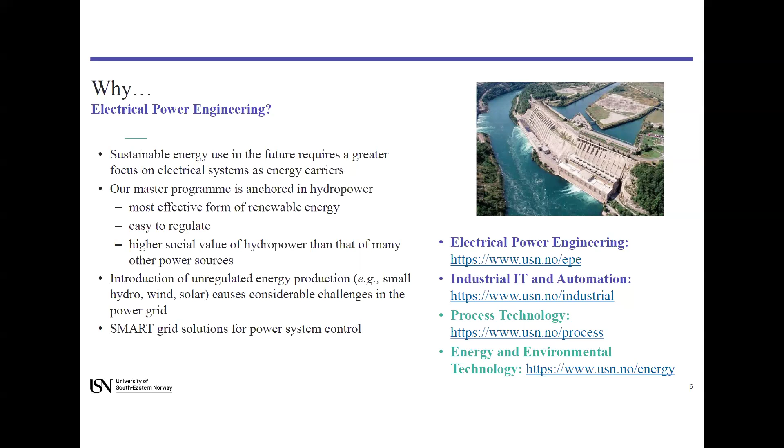We have different research groups focused on power, energy, smart entrepreneurship, modeling, control, etc., which are our specializations in the department. Most of our research activities are funded by the Government of Norway through the Norwegian Research Council, or from private industries or regional authorities. Our close collaborators include SINTEF, the largest research center in Norway and across Europe, as well as Equinor, the largest offshore wind technology developer, and local municipalities including Porsgrunn and Skien municipalities, and ABB.

As I said, we are running many projects in close collaboration with industries, which includes hydrogen as a powertrain for ships and ferries, in close collaboration with Statnett, the largest transmission and distribution operator. We are also working in India on many developments in transmission and distribution in collaboration with the Government of India, and we have a close collaboration with the National Renewable Energy Labs from the United States.

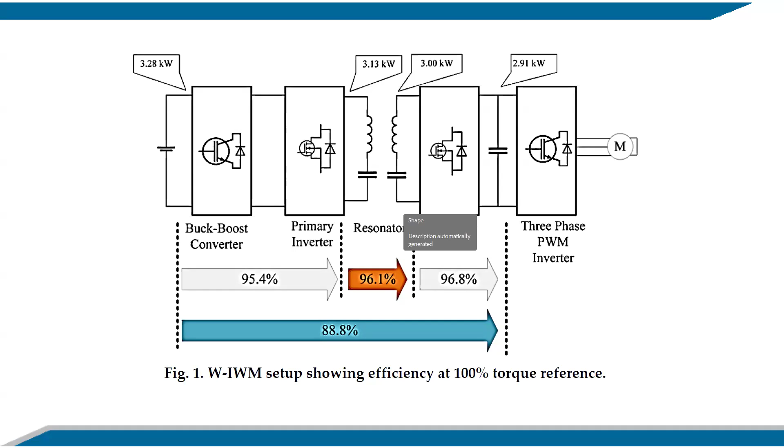Moreover, the design of high frequency coils also has magnetic losses. These losses need to be compensated, so wireless charging is still not very attractive for these reasons. Regarding batteries, currently all electric vehicles are focused on batteries, but many batteries are prone to runaway or fire incidents, because some guidelines are not being followed by manufacturers.

Where do these guidelines come from? They come from the Advanced Battery Consortium, which is called USABC, from the United States. There are some guidelines, a primary goal and a secondary goal, to design the batteries. So in case of energy density, it is around 135 for the midterm, and for long term it is 300.

Life cycle for charging and discharging will be around 600, now extending near to 1000 is possible with the EVs currently available in the market. And the price of the batteries per kilowatt hour is less than $150 for midterm, and long term is around $100. The operating temperature is around minus 30 degrees to 84 degrees centigrade in consolidated operation between midterm

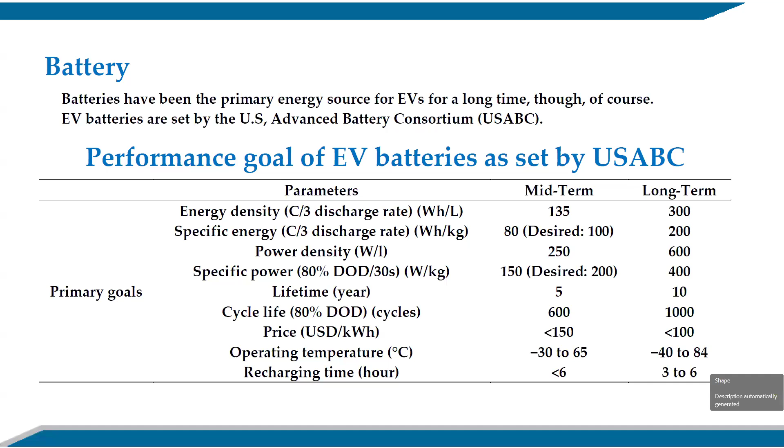to long term. And charging is always less than 6 hours for small vehicles, and for long term goal is around 6 hours, which is pretty high. And about fast charging, which is a recent attraction in electric vehicles with the batteries, with respect to the state of charge, it is less than 30 minutes. Still, we are not having such facilities.

And about the future, as I said, we are moving from fuel cells and fossil storage tanks into DC grids, because charging all these batteries in the future is required. We have different levels of batteries. Here I have shown until 600. Now the scales rise up to 1200 to 1800.

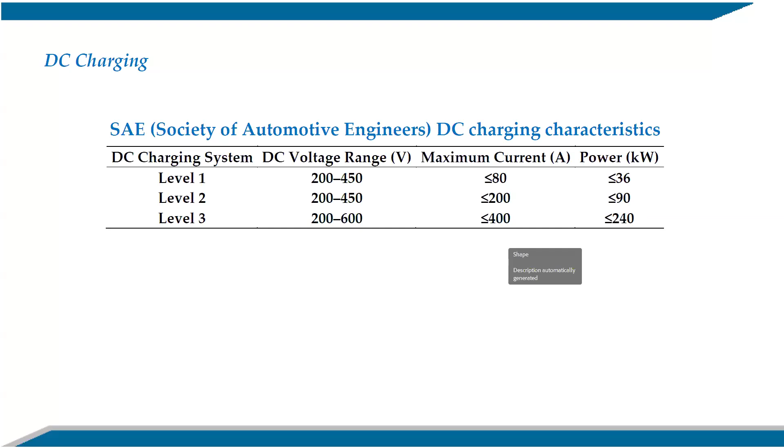And in these three level scales, the power can vary from 36 kilowatt to 240 kilowatt capacities, and the current can vary from 80 to 400 ampere capacities. But the scale, as I said, has been increased now to 1200, next 1400. In the scales of 400, DC microgrids are required.

About power electronics converters, many configurations that I have shown here are already available in the literature, and are widely used in practice. So if you look at this converter, which is called a universal DC to DC converter, it's a parallel combination of two buck converters connected with one boost converter. So increasing the current can be done here, and whatever voltage is available at this device will be increased to a higher level.

Again, it has been stepped down by using a buck converter. So a buck converter is a voltage to current converter. On the input side, you'll have a higher voltage. On the output side, the current will be higher. So for the charging applications, we use this combination to enhance the capacity. What is the drawback? Limited duty cycle combinations.

Even though we are increasing the current to higher limits, the devices have a long conduction angle, which increases the conduction losses, and the overall efficiency of the system, even if you increase the current, will be limited by conduction periods.

And in other aspects, novel configurations are available in real time, even for fuel cell tank power applications, where we can replace these batteries by fuel cells on either side, or one side with the fuel cells and one side with the batteries, keeping the propulsion system, which is a three-phase open winding induction drive. So you have been seeing the configuration, which has a power supply on one side, and the other side will have a star point.

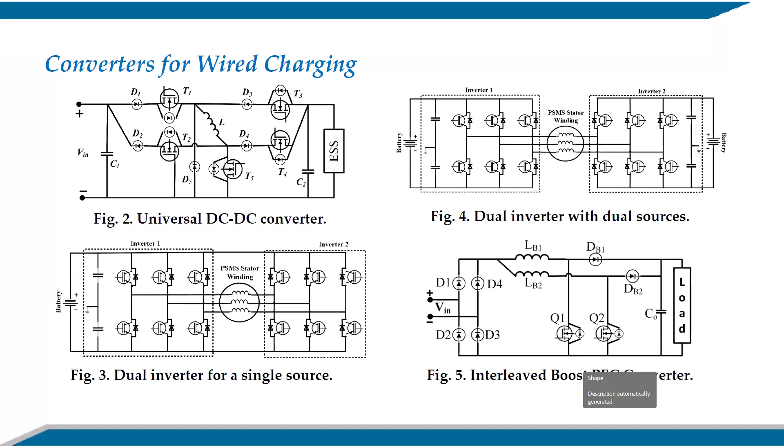And we are using classical boost converters. Again, it is limited by duty cycle, even though we increase the current. So there are some disadvantages in controlling the conduction angles and the duty cycle for maximum utilization. And these all cause more losses and reduced efficiency. Apart from that, we also have other four diode controlled rectifiers on the input side. You can have a look.

And in the full bridge converter here, we are using only two devices which are controlled, whereas the upper devices are only diodes, which is called a semi-controlled H bridge converter, which can control the DC power effectively from the AC. But as we know, we are using half cycle control with two MOSFETs or IGBTs. The efficacy reduces and of course there are more losses in the charging units.

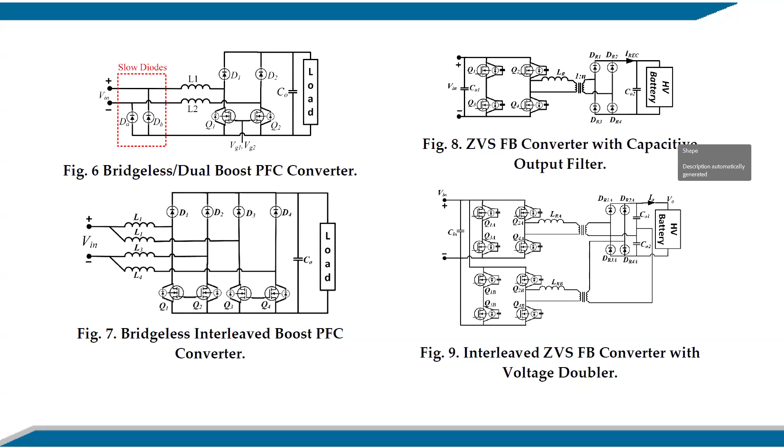The most effective is the LLC resonant converters, where we use a fully controlled bridge rectifier. On the transmitting side, we are including a magnetizing inductor and a capacitor additionally, so that we can improve the turns ratio. In the previous case I showed you, it's a fixed ratio 1:n, but here we can have a variable ratio n1:n2, so we can have variable taps on the transmitting and receiving coil, so that we can have a different power scale of power transfer from the DC side towards the battery or electrolyzer.

And currently we use the modules which are uncontrolled bridge rectifiers. This is a big problem. They are slow transient diodes and are not fully controlled. So we get reduced voltages with much more losses because diodes are slow transient, and the capacitor size needs to be compromised and produces more heat for the batteries.

Finally, I'd like to say either it's for electrolyzers or for hydrogen production interconnected systems, or for batteries, we have options like buck converters, which can be used to send the power from the motor or to charge the batteries. Other options, we have the buck boost converter, which has two modes of operation. We can deliver the power to the batteries or take the power from the batteries towards the propulsion units. The propulsion unit powertrain can be batteries or can be electrolyzers.

So for example, when you apply the brakes in electric vehicles, you generate a lot of reactive energy or regenerative energy from your motor, and it will be fed back to the batteries. It's very dangerous. That's why these power electronics converters play a critical role in both directions, for driving as well as for regenerative energy generated from the motor. It can be stored in the batteries.

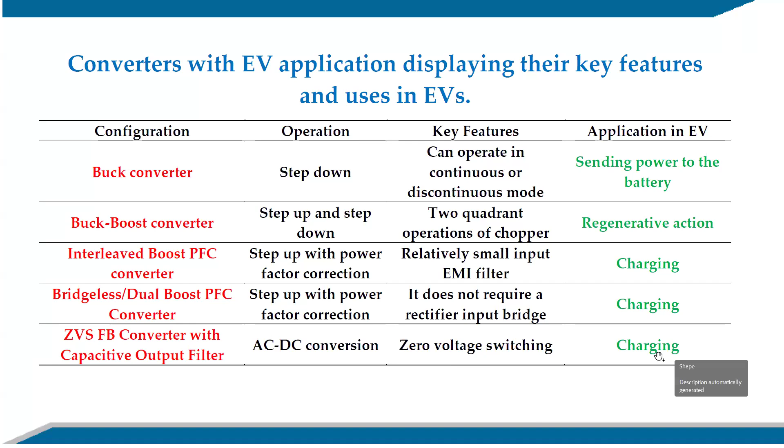And of course, I discussed full bridge converters with the capacitor filters on the transmitter side with zero volt switching, where we can go for variable taps. By using zero volt switching, we can reduce the noise and of course, the losses. Of course, we can use this only for charging.

The fuel cell train is going to be a big market across the globe, and the government of India already declared by 2030 to 2035 to be the largest hub for hydrogen production across the world. And in the context of the European Union, already many electric vehicles are deployed as a hybrid model. We use electric batteries along with the fuel cell as a powertrain, and the fuel cell is the main powertrain, and batteries are like substitute modules during the requirements. And the shift between the fuel cell and batteries is automated by using power electronics converters for power conversion.

Why does the fuel cell have a big market? Because it can be adapted for a 50-watt power supply or even for a small 1-watt power supply towards a maximum 100 megawatt capacity. The most important is the resistance to temperature, which can vary between -20 to greater than 800 degrees centigrade. And the power scale application can be for small power or large power. It can be a vehicle or grid connected systems.

For example, a zinc air battery, which is a typical module of fuel cell, is not widely used. Currently, we use the proton exchange membrane, widely used in practice. So, for example, if you are going to use a zinc air battery, it can be adapted for small power applications, for example, transportation, small vehicles. And regarding the temperature, it can be adapted between 0 to 80 degrees centigrade, and it can be used for applications of less than 50-watt capacity.

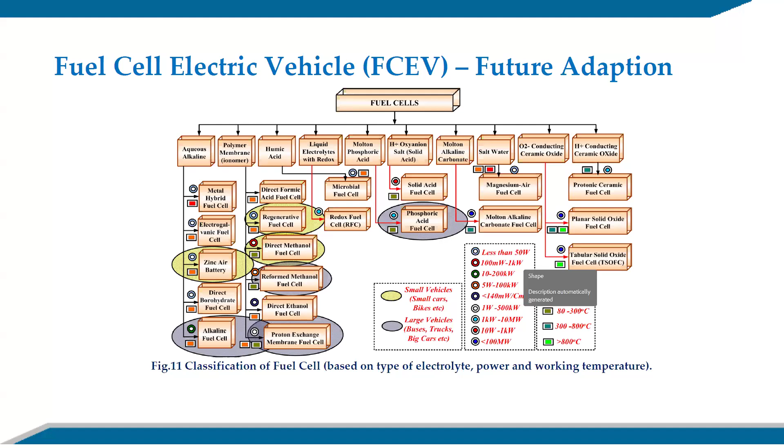For example, for a small domestic car, it's okay with a battery, but think about ships, ferries, or very large transportation systems. So in 2026, one of my collaborating companies from Norway, Brunwell, we are doing a project on offshore hydrogen production in coordination with other partners from Europe, where the Brunwell company is going to release its first 100% power-driven fuel cell ferry in the Nordic Sea.

How it looks, powertrains. For example, in case of a fuel cell based powertrain, we'll have a fuel storage for hydrogen. It will be given to a fuel reformer with an efficiency of 80%. And the fuel reformer is connected to the fuel cells, and the fuel cells' efficiency is only 60%. So efficacy of the fuel cells' power generation is limited by 60%. Here come the power electronics converters to utilize this 60% efficiency very effectively for the powertrain.

So we have two-stage power conversion. The first stage, we use DC to high power DC for the powertrain requirement within the electric vehicle power supplies. Then it is given to an inverter which converts to AC power to drive the induction drives or synchronous drives of the electric vehicle. So efficacy minimum level starts with 80%, which is very effective. By using modern GaN devices or silicon carbide devices, the efficacy can go near to 99%.

Apart from the powertrain, we also have luxurious needs within the electric vehicle. All these can be powered from a small power electronic actuator, which is called a DC to DC converter, with a minimum efficiency of 80%. As I said, for many applications, hydrogen is more expensive. So we look for a combination module. In a combination module, we can bring batteries and ultra capacitors.

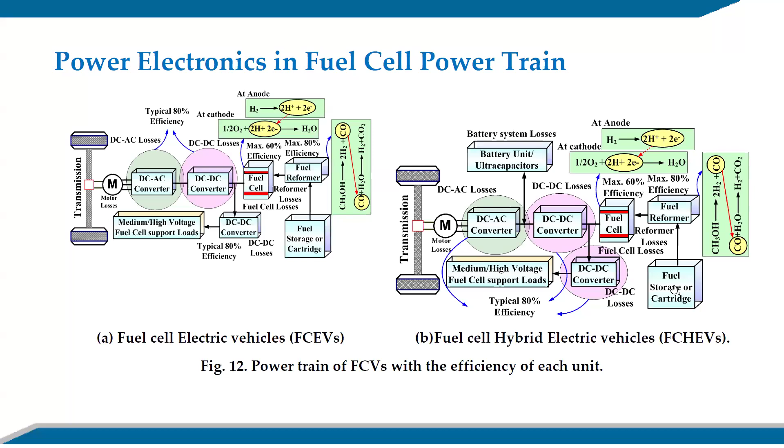So in the future, the vehicles will be propagated along with hydrogen and supercapacitors as definite modules. If you look at a large powertrain application like ferries and trucks, we need to depend more on fuel cells. So the fuel cell is the main powertrain, which is connected to a small actuator for electronics converters to maintain a DC grid of around 1200 volt to 1600 volt as a requirement. On the propulsion side, we will have large synchronous machines which are connected using inverters to convert all this DC power to AC.

And we can't avoid the AC load, which is going to be, for example, around 20 kilowatt capacity, again driven from the inverters. And we have sophistication requirements like lighting, etc., which can be around 25 kilowatt, again driven from a small actuator DC to DC converter. So you can have a look at how a complete powertrain module looks with fuel cells, batteries, and supercapacitor integrations.

So in these aspects, we have developed many of our own power electronics converters in the laboratories where we integrated different renewable energy systems. If you look at conventional modules, we have photovoltaics, wind turbine, and battery, which require four different converters. Because the wind turbine has AC power, it has to be converted into DC and pumped up to a higher level to integrate for different applications.

So with our multi-port converters we developed in our labs, it has multiple combinations of our ideas based on circuit theories. We can connect one converter with multiple inputs, but for the wind turbine, the power has to be converted from AC to DC, so we need additional converters. But the application aspect is the same.

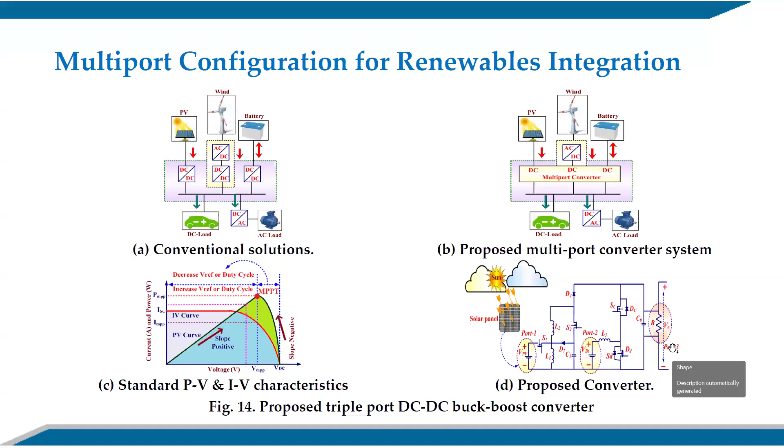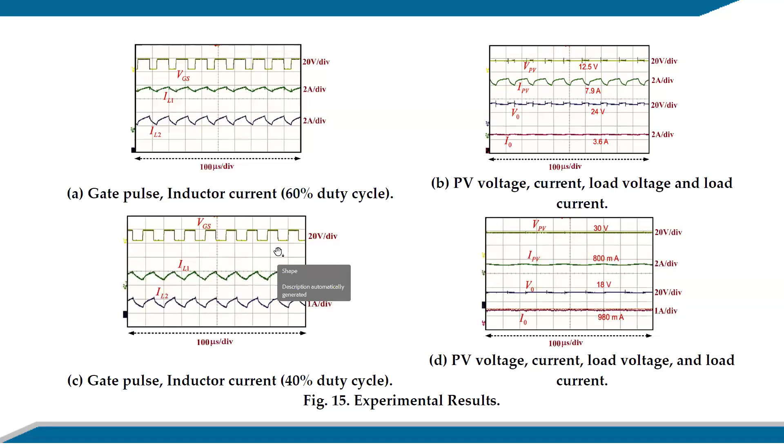And these are modules, you can have a look in simulation modules. Obviously, the efficiency will be very high, near to 97 to 98%, but not in real time. The efficiency is limited to 93% because of various switching losses, conduction losses, and EMIs.

On these aspects, particularly for fuel cell aspects, we develop new power electronics converters from our own ideas to integrate for higher voltage levels between 400 to 800. For laboratory testing, we withstand around 400. So the interconnected system has large scale fuel stacks, photovoltaics, and batteries. Why we use batteries? Because if there is excessive power generated from the fuel stack and photovoltaics, it will be stored in the batteries, and during the peak demand for electrification of electric vehicles or DC micro homes or DC homes or existing AC grids, we pump the power from the battery.

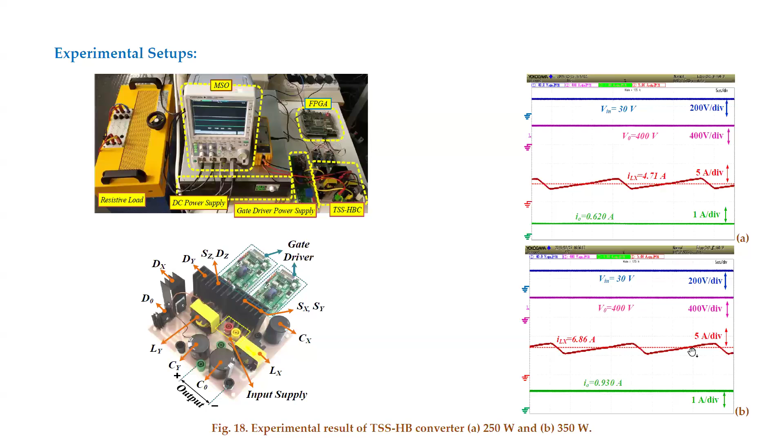For more visualized results, you can have a look—why we are zooming into these results is to show you how the modulation of the converters is carried out for smooth regulation of all these currents, which are very vital. Apart from that, we also worked on industrial solutions.

Quasi-Z source inverters are highly used in forklift applications where high power trains use small electrolyzers or battery banks. In this case, we try to figure out a new configuration, a modified solution.

We introduce a switching inductor. We call it a switching inductor because it stores and delivers energy to the capacitor based on switchings. Here we introduce a new configuration along with capacitor C2. It becomes a novel configuration of the quasi-Z-source inverter.

The idea is: when the switch is closed, we energize the inductors LX, LY1 and LY2. When the device is open, this energy is delivered to C1, and the LY1 and LY2 energy is delivered to capacitor CY. All these capacitors operate in parallel, adding up the voltage and delivering it to the load side standard boost converter.

If you look at a quasi-Z-source converter, the lower side is a very standard boost converter. All configurations available in industries or research are based on a standard buck or boost converter. For example, if you remove all these blocks and put a MOSFET, it becomes a standard boost converter. So we are adjusting based on circuit theory, and combinations of passive components create new configurations.

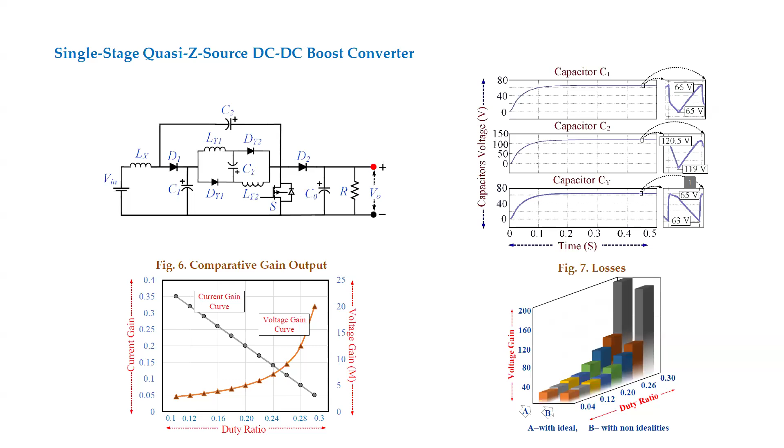If you look at the ripple content or AC component available in the DC, it is limited to not more than 1 or 2 volts, which is pretty good for regulating IEEE standards and ensuring the reliability of electrolyzers connected on the input side.

Of course we also worked on SEPIC converters, because SEPIC converters are highly used in forklifts to integrate electrolyzers and battery banks, but their efficiency is limited, power density is limited, and overall power transfer is limited.

So in this case we made a new modification by introducing the inductor Ly and capacitor C2, a new combination. We brought a new modified SEPIC converter which is able to enhance high power density.

For example, when the device is closed, we energize Ly and Lx. When the device is open, these energies are delivered to C1 and C2, and they become a parallel combination to increase the load side boost converter voltage. This is a load side boost converter, but with an inductor grounded between the positive and negative, so we get a very high power voltage on the load side compared to the existing SEPIC converter.

If you look at the losses: the device provides 47% losses, the diode between 12 to 13%, inductors 10%, capacitors 5%, and the combination of other passive components around 0.4%.

Typically we tested all these high power converters at a low power scale, like 100 watts, for safety reasons. We got efficiency around 91.4%. If the power scale is increased, we will obviously get around 98% efficiency.

Most importantly, power electronics converters do not operate linearly when integrated with electrolyzers or batteries, because they are highly non-linear. We try to figure out these non-linear operations. We call it continuous conduction mode, which is a linear operation, and discontinuous mode of operation, which is highly non-linear because the frequency goes much higher than the switching frequency.

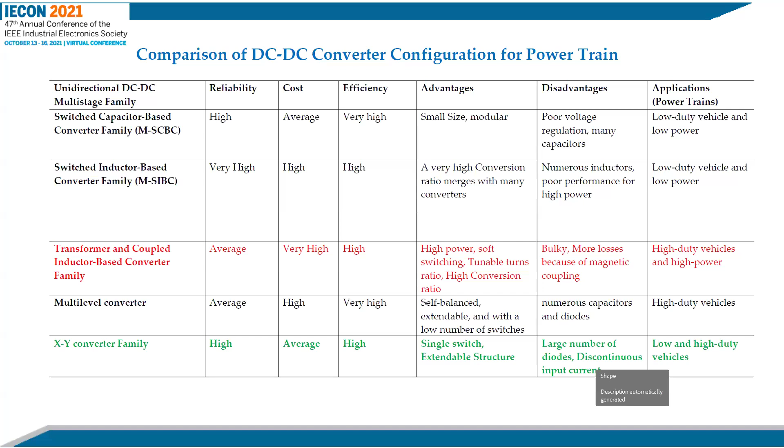Apart from DC converters, we also work on AC converters having six-phase systems where we are able to use electrolyzer as one source, along with batteries, supercapacitors, and photovoltaic modules. So we can have four different power supplies integrated into the same system for high propulsion devices like multi-level converters. The advantage of these converters: if one fails, we can still run with three.

At the worst case, if three inverters fail, we can try with one inverter, but the power is reduced to 1/4. If all four are available, we can run at 100%, but with only one, it goes down to 1/4.

What is the advantage? The phase voltage is like a multi-level inverter, which goes to 9 levels. The fundamental voltage has a pure sinusoidal structure, and the line voltage can pump up like a 5-level inverter with more sinusoidal characteristics.

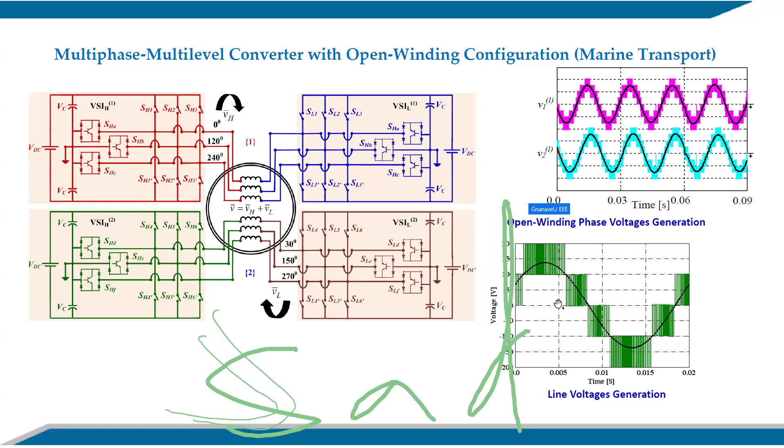In conclusion, I want to emphasize how fuel cells will have a futuristic goal. It will be the main powertrain for low-cost vehicles, becoming a prerequisite because with batteries alone we can't run for long. Currently, lead acid batteries are not available for this purpose. Lithium ion batteries are currently used but have a limited lifespan, and there are efforts needed to find new technologies for recycling, with still no reliable solution available.

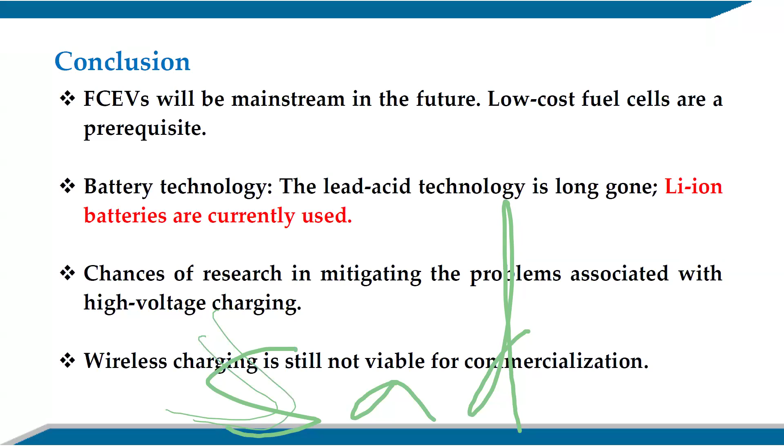Voltage instability may arise, and harmonics and voltage sags will occur by integrating all these renewables, particularly with high electrolyzers. Then smart grid technology needs to be employed. In the future, all these vehicles, particularly from the battery concepts, will connect with the grid-to-vehicle system by adapting smart metering technologies.

We'll be discussing this in my second lecture in a few days, where I will show how we are integrating IoT sensors and smart meters on these topics, which also creates system stability and penetration issues. So for future research, there is a big goal for energy management algorithms using AI solutions, artificial intelligence solutions, and of course there is a demand to increase energy management algorithms.

Thank you very much for your attention. If you have questions, I'm happy to respond.

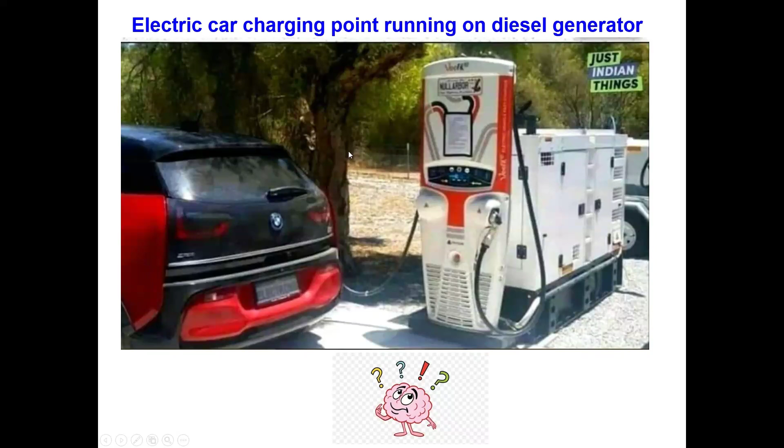So alternatively, we have to use renewable energy sources. Wind energy has the capability to fulfill the current energy demand, but it is seasonal as well as regional. You won't get wind throughout the year, so you are unable to produce electricity throughout the year. But alternatively, consider solar. India is a sunlight-abundant country. So we have to consider solar for making the perfect green vehicle. This is the first option.

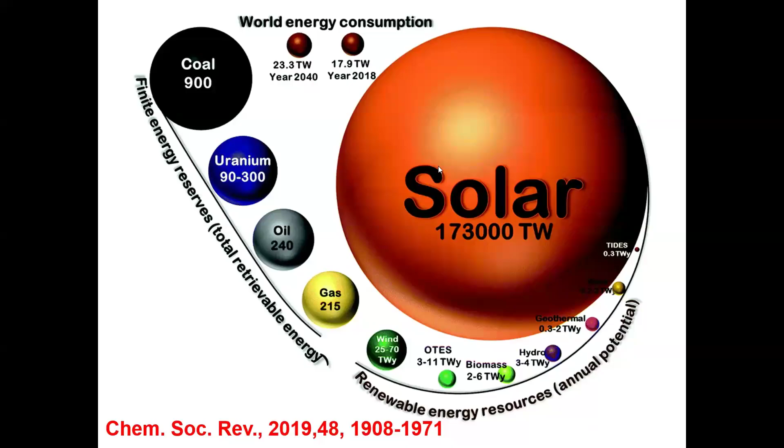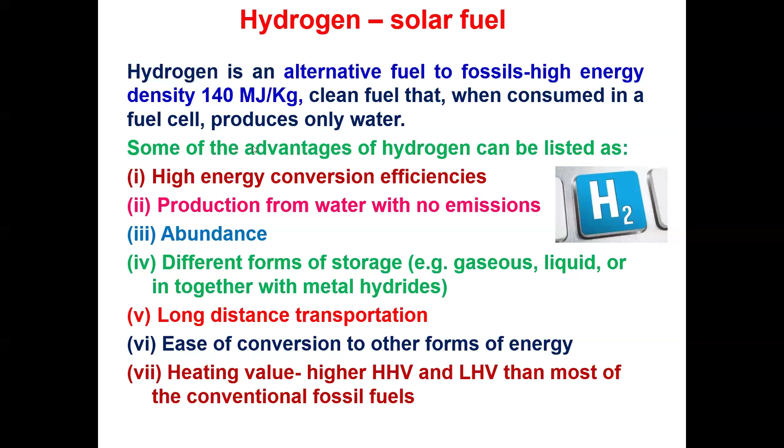The second option is hydrogen. Hydrogen is an alternative to fossil fuel. It has a high energy density of 140 megajoules per kilogram. It is a clean fuel, and it can easily be produced from water. Hydrogen is earth-abundant, and while producing hydrogen from water, no hazardous substance is produced. You can easily store it in different formats, like gaseous, liquid, or solid state. So it can be used for long distance transportation. These are all merits of hydrogen.

Hydrogen has different color codes based on the origin of the starting material and the method of production. There are three methods used to produce hydrogen: electrolysis, steam methane reforming, and coal gasification. In coal gasification, we use coal as the starting material. While producing hydrogen, it emits carbon dioxide into the environment. If you leave that emitted carbon dioxide as such, it is called black hydrogen or brown hydrogen. If the emitted carbon dioxide is captured and stored, this kind of hydrogen production is called blue hydrogen.

When you use natural gas as a starting material, it is subjected to steam methane reforming. It produces hydrogen and releases carbon dioxide to the environment. This kind of hydrogen we call gray hydrogen. When we use the electrolysis method and the electricity used for splitting water is generated from nuclear energy, it creates nuclear waste, so we call it pink hydrogen. If we use renewable energy like solar or wind for the water electrolysis process, it is called green hydrogen. So these are the color codes for hydrogen.

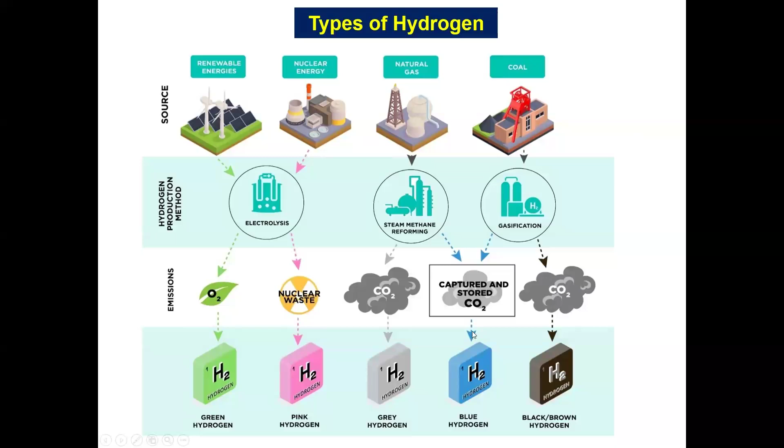Now look at this. These are fuel cell vehicles. This is a fuel cell train running in Germany. A fuel cell truck. This is Toyota Mirai running in Japan. This is a zero emission bus running in the United States of America. This is a Hyundai truck. These are all e-vehicles, but they use hydrogen as the starting material for producing electricity.

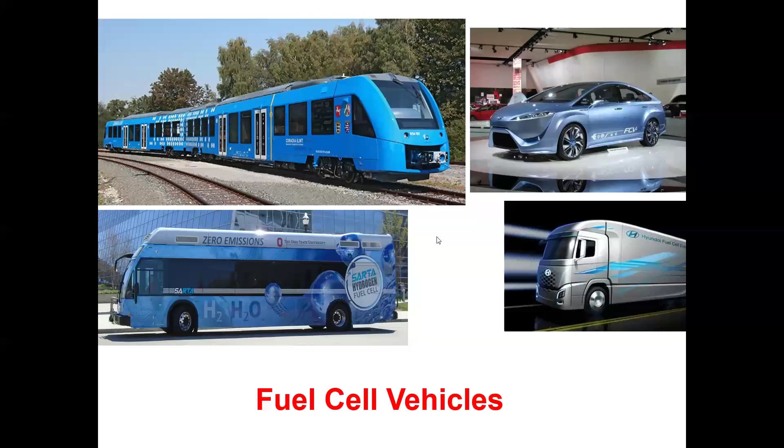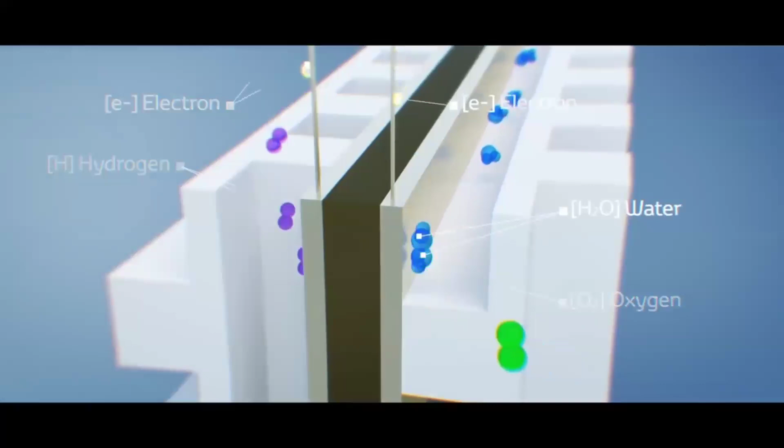Sir, yes, ma'am. Sir, you have muted your mic. Please unmute it, sir. What is that, ma'am? Your video volume we couldn't hear, sir. There is no volume, madam. Okay, sir. Okay. Thank you.

So if we have hydrogen, we can run a 100% green vehicle for mobility. This is the advantage of the fuel cell vehicle. If we compare with a plug-in type EV, you have to wait 2 to 3 hours for a complete charge to drive 400 kilometers. But here, in 3 to 5 minutes, you can fill 5 kg of hydrogen and drive up to 500 kilometers. That is another merit of this.

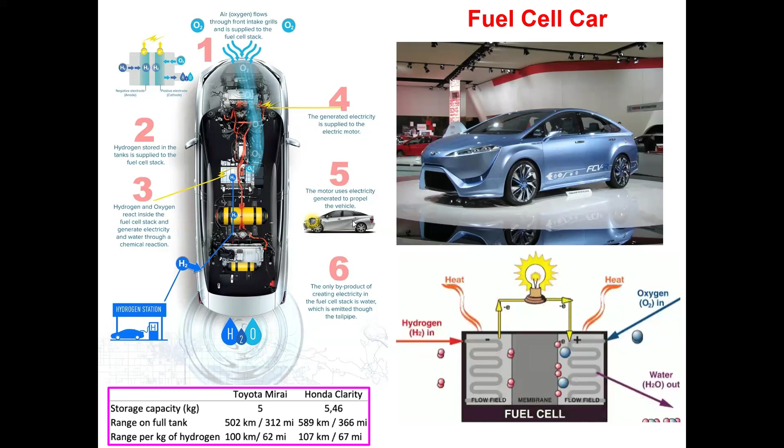Whenever we talk about the advantages of a system, we have to see the limitations or drawbacks. Hydrogen is highly flammable. One time a Toyota Mirai car had an accident, the hydrogen storage tank exploded, and it immediately caught fire. There was another incident in Norway where, due to improper handling and storage, a hydrogen filling station exploded.

Excuse me, sir. Sorry to interrupt. It requires high pressure, no, sir? So storing hydrogen and the safety-related issues, how could we handle them? That's what I am going to explain. Okay, sir. Sorry.

Later, all the vehicle companies did R&D. Because it is stored at high pressure, you need an excellent storage tank. It is developed with a layer-by-layer structure: high density plastic as the inner layer, then carbon fiber composite to prevent catching fire, then glass fiber composite, then polymer foam, and finally fire resistant composite material at the top to protect it.

For mechanical strength, they use the polymer foam and this layer-by-layer structure to avoid explosion as well as catching fire, and they use flame resistant composite material. Finally they ended up with this. Later they did a crash test, and this time the car got physical damage only. The hydrogen storage tank didn't explode.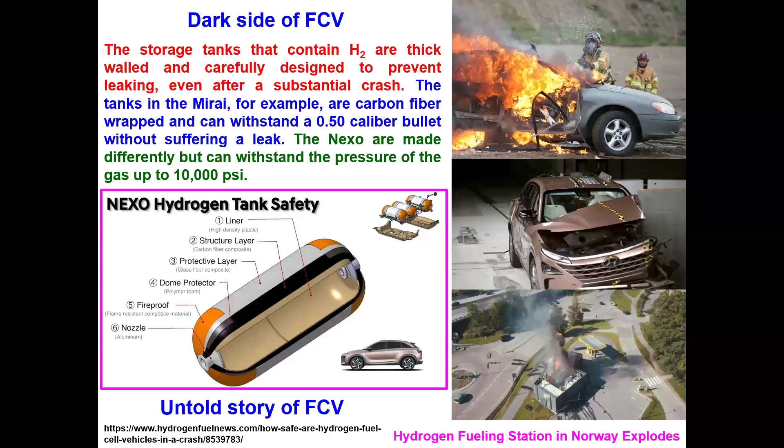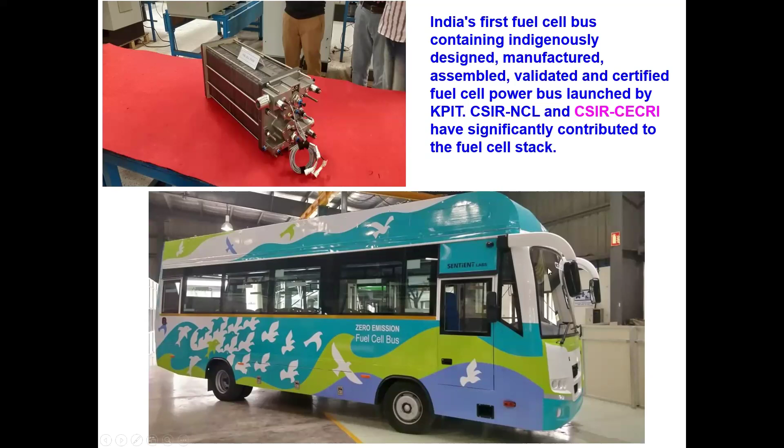You may ask, sir, any technology introduced abroad takes at least 10 to 15 years to reach India, so when will we have this kind of technology? For that, at CSIR-CECRI, we developed this zero emission bus with materials available within India. We transferred this technology to Sentient Labs, and later it was extended to Tata Motors. Tata Motors offered 20 buses to IOCL employees.

On the road that leads to the dream of greener mobility, the world now gets a new set of wheels to steer that journey towards reality. Presenting Ashok Leyland's pioneering technology, the hydrogen internal combustion engine vehicle built on the AVTR modular platform. The fuel delivery system on this vehicle is modified to use green hydrogen instead of diesel. A strong carbon fiber composite cylinder ensures safe storage and high pressure endurance of up to 350 bar. That's extremely easy to install, lightweight, and maintenance free.

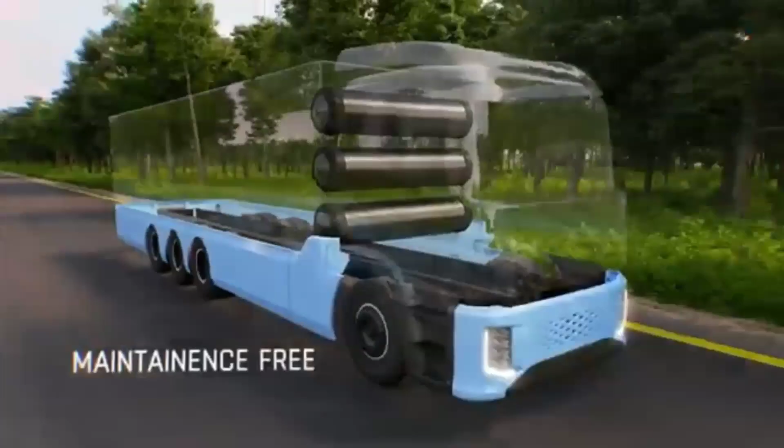With minor changes to our H series 6-cylinder internal combustion engine, we are able to deliver power and torque equivalent to a conventional engine. With a lean combustion strategy, it ensures minimal emissions and less noise, resulting in an efficient, cleaner, and quiet drive. The hydrogen internal combustion engine vehicle delivers the highest payload and long range. Its aggregates are similar to a diesel vehicle, aiding easier maintenance, all while complementing the hydrogen mission that supports the Atmanirbhar Bharat initiative. These benefits make hydrogen internal combustion engine vehicles a perfect vehicle to drive us towards the future.

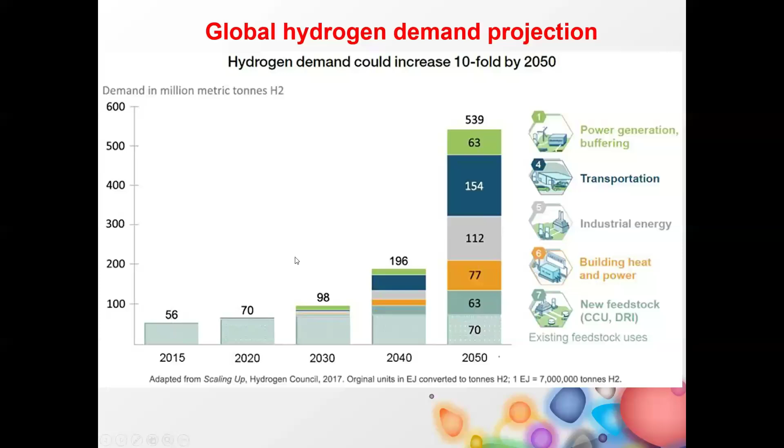So it means hydrogen will be used not only in the transportation sector, but in different sectors, including producing electricity. That's why this much hydrogen energy demand happens. So now let me see. So how are we going to meet this much hydrogen demand? That we have to see.

So what technologies are available for meeting hydrogen energy demand? We always evaluate technology maturity through the TRL scale. TRL is nothing but technology readiness level. If we state the TRL number, we can assume how far the research has progressed. For example, TRL 1, 2, 3 is basic research at lab scale. If a student does a project and submits a thesis, that is TRL 1.

If you quantify the same thing and publish it in a journal, that is TRL 2. Then if you go for a patent, that is TRL 3. So levels 1 to 3 are all basic, academic level, just knowledge development. But when we talk about TRL 4 to 6, here you have to scale up the process and develop the technology. That is TRL 5.

The same technology demonstrated in collaboration with industry is TRL 6. TRL 7, 8, and 9 are highly matured technologies. That means you want to commercialize a product and send it to market. You evaluate how much profit to make: bank loan principal and interest, building cost, rent, machinery cost, salaries, marketing, income tax, all included. Finally you fix the price.

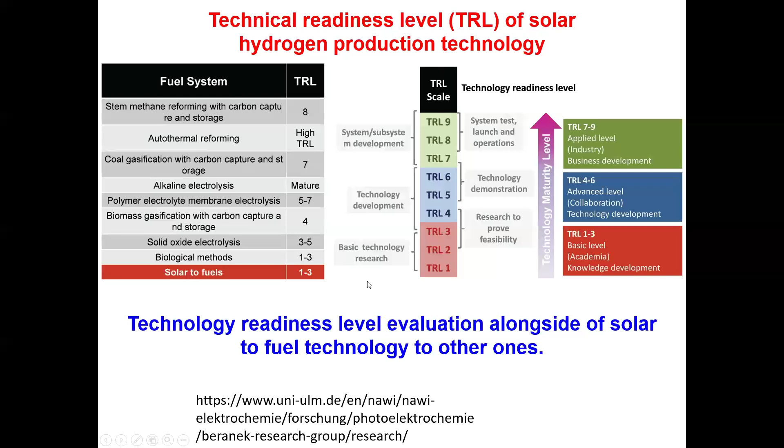For that, our honorable Prime Minister announced the National Green Hydrogen Mission. Its objective is for India to become a global hub for green hydrogen production and export. Initially they announced an 800 crore budget. Then the Union Cabinet in 2023 approved a budget of 20,000 crores for green hydrogen activity. The expected deliverables by 2030 are green hydrogen production capacity of 5 million metric tons per annum, and since we use electrolysis, electrolyzer capacity up to 100 gigawatts.

We are using renewable energy for electrolysis. The excess electricity will be connected through the grid, increasing it to 125 gigawatts. These are the direct deliverables. The indirect deliverable: if we move to fuel cell vehicles, we will not use diesel or petrol, so we can stop crude oil imports worth 1 lakh crores.

Then, as per the Paris Agreement, every year 50 million metric tons of CO2 emission will be stopped. Then it will create 6 lakh job opportunities and 8 lakh crores of corporate investment towards green hydrogen related activity. I will give one typical example for the last two cases.

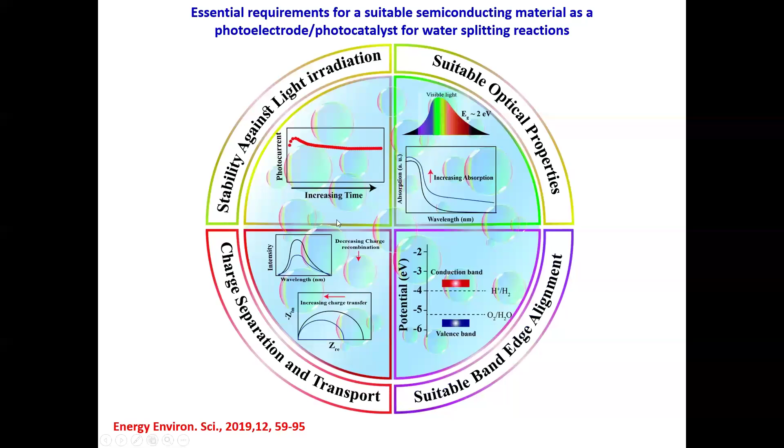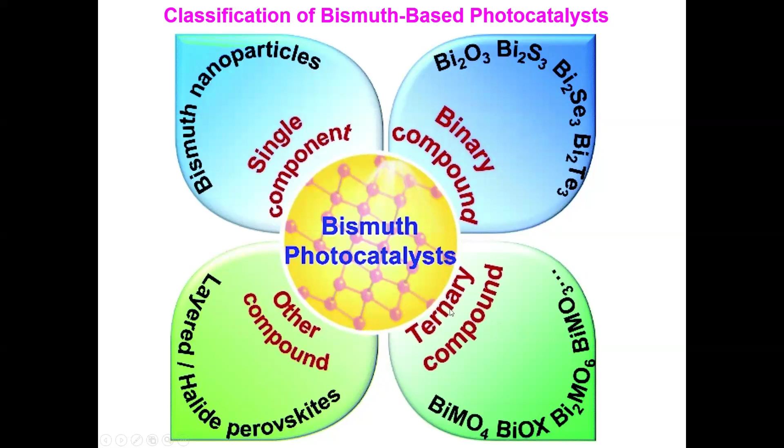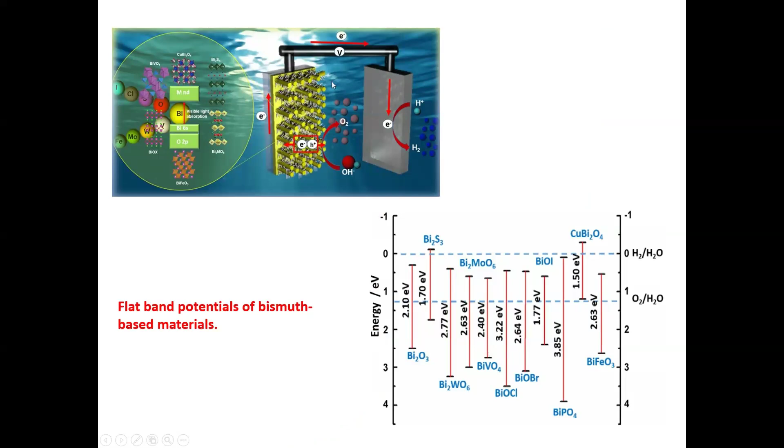Why? Because bismuth-based material has a potential more positive than the oxygen evolution potential, so it is more beneficial for the water oxidation process. This water oxidation kinetics is the rate-determining step. If we can easily oxidize the water, we can enhance the hydrogen production rate. That's why this is our interest.

But when we use a pristine semiconductor, what happens is the performance gets quenched because of the charge recombination process. To overcome this limitation, you can do component adjustment, surface modification with a conducting material, tune the morphology, or form a heterojunction. So our interest here is the heterojunction strategy.

We are doing heterojunction formation. Why? Look at this analogy: a person is jumping from the ground, and due to gravity, he falls back on the ground. Likewise, if you take a single semiconductor, upon irradiation it will undergo charge separation, but due to the Coulombic force, the electron and hole will recombine, and the net result will be zero.

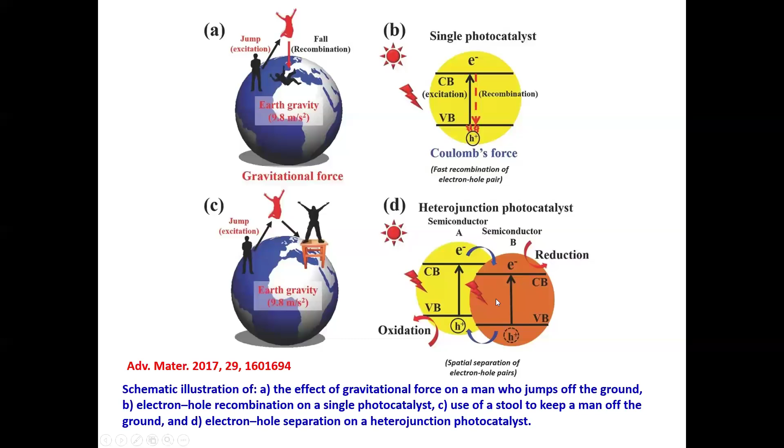But look at this other picture: you can add a table or chair, then jump and stand on it, so you are spatially separated from the ground and gravity. Likewise, you can add another semiconductor. Here, the electron will step down and the holes will step up, so the electron and holes are spatially separated. This process is very efficient.

The heterojunction can be classified into three types: straddling gap (type 1), staggered gap (type 2), and broken gap (type 3). These types are based on the band position of the neighboring semiconductors. In type 1, the electron and holes move in the same direction. In type 2, they move in opposite directions. In the broken type, it is very difficult to transfer the electron, so although it is predicted, it is not practically used.

Other than that, you already know semiconductors are of two types: P-type and N-type. If you combine a P-type and N-type semiconductor, you can form a PN heterojunction. Once contact is made between these two, it creates an internal electric field at the space charge region. As a result, the holes step up and the electrons step down, so oxidation takes place at the P-type and reduction takes place at the N-type semiconductor.

Other than that, sometimes if some reactions are thermodynamically not favorable, we can go with the Z-scheme mechanism. You can add a mediator, then step up the electrons and step down the holes. This is the best way to perform this. So it is a mediator-based Z-scheme mechanism, and this other one is a mediator-free Z-scheme mechanism.

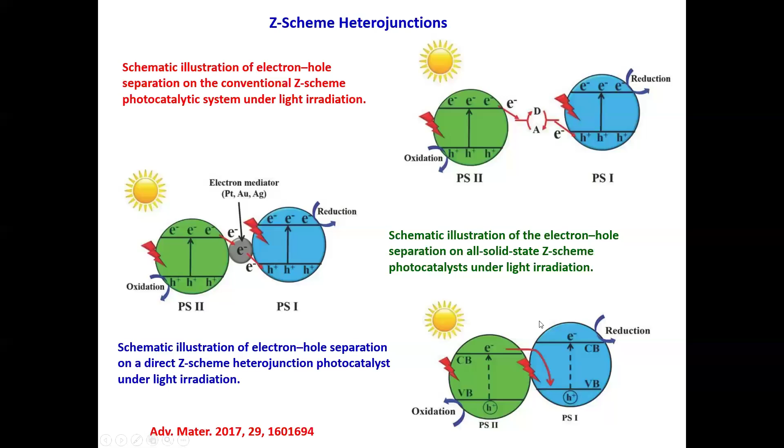You can see there are plenty of materials reported for photoelectrocatalytic water splitting for green hydrogen production, with suitable band positions. There are metal oxides, metal nitrides, metal chalcogenides - everything containing metal is a catalyst. But there is one catalyst called g-C3N4, which doesn't have any metal, so it is a metal-free semiconductor. This is the g-C3N4 structure.

Actually, it is two types. One is heptazine based, another one is triazine based graphitic carbon nitride. It has visible light absorbing capability, and also it is metal-free, non-toxic, low cost, and you can easily tune the structure.

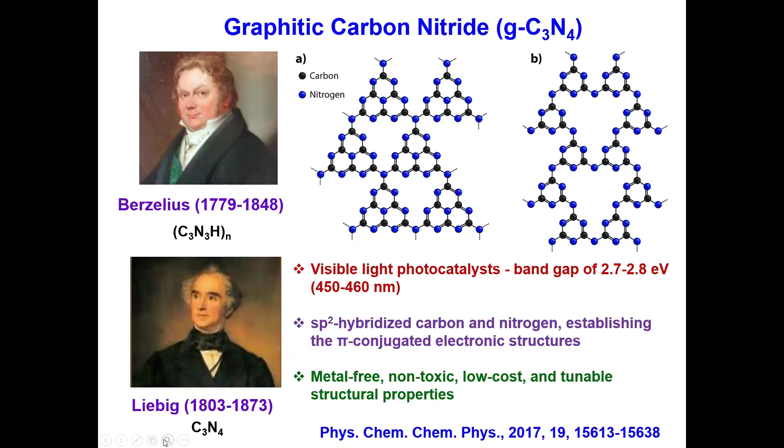These two structures were predicted by Berzelius and Liebig. So just look at this - this is the triazine based one, this is the heptazine based one. This is highly stable due to the extended double bonds, more number of double bonds here. It is less stable.

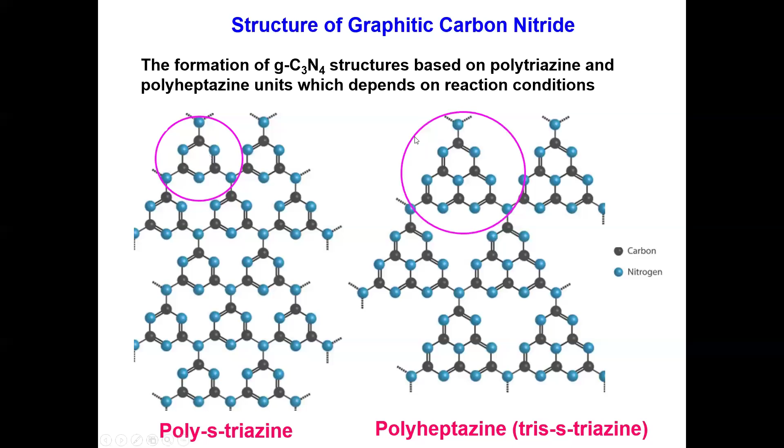This is preferred to form at all times during the synthesis. So this can be synthesized via two methods - one is top-down approach, another one is bottom-up approach. In the top-down approach, you take a bulk material, then do exfoliation, and finally you get nanosheets.

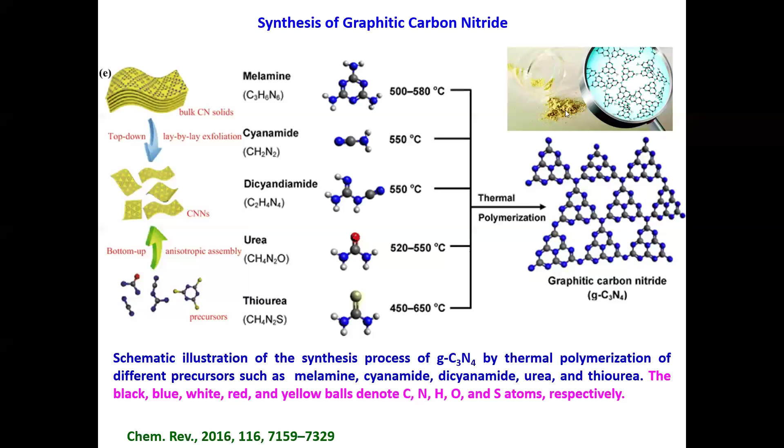In the bottom-up approach, you can take molecular precursors like melamine, cyanamide, dicyandiamide, urea, thiourea. Then accordingly you heat it up to 500 to 550 degrees Celsius, and finally you get heptazine-based graphitic carbon nitride. You can see this yellowish color - it has that tendency for absorbing the visible light region. So this is the formation pathway for this graphitic carbon nitride through different methods.

So it's like this - you can go with this. If you take cyanamide, then it will form dicyandiamide. Then dicyandiamide becomes melamine, melamine becomes melem, then finally the polymeric form.

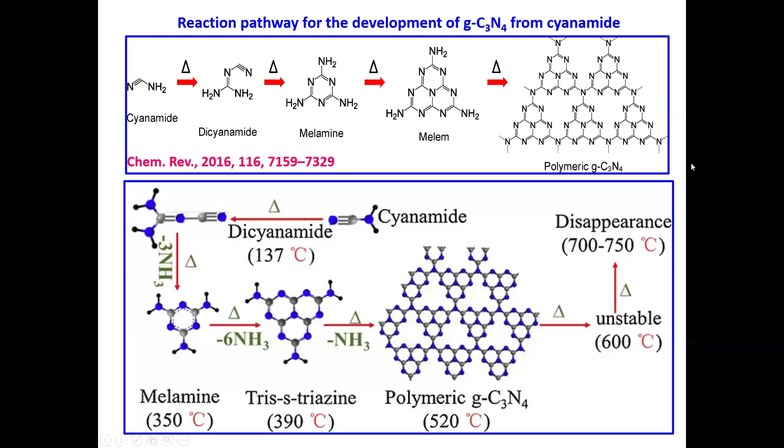So you can easily tune the structure by adopting different methods and choosing the precursor and the templates. Accordingly, you can tune the structure as well as the surface area. So both will be this one.

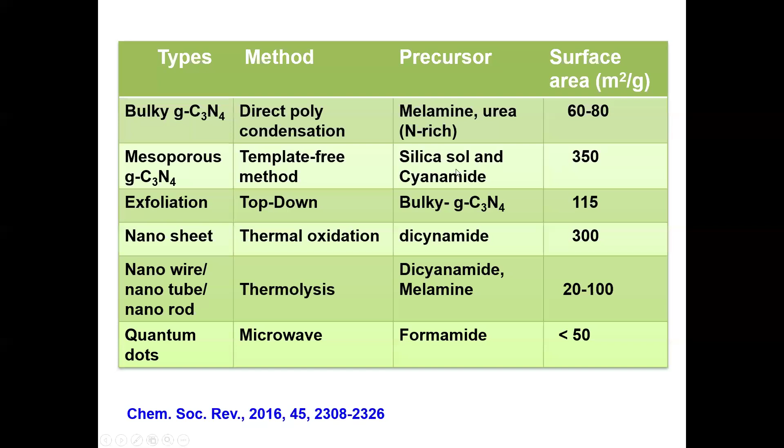So I will just show one example for this graphitic carbon nitride bismuth heterojunction for photoelectrolytic water splitting. For that we have taken melamine and mixed with ammonium sulfate and mixed for some time. Then it is subjected to calcination at 520 degrees Celsius for 2 hours. Finally, we got the nanostructure.

Then we have taken the molybdenum and bismuth precursor in ethylene glycol. Then we added different weight percentages of graphitic carbon nitride and subjected it to solvothermal treatment. Finally, we end up with the heterojunction material.

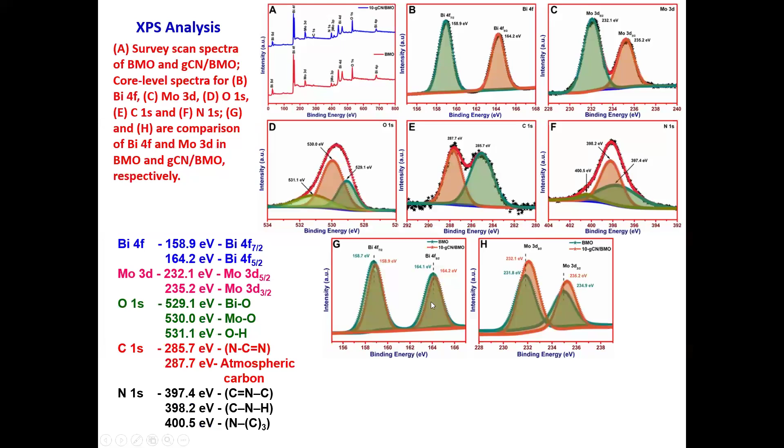So we have done elemental mapping to confirm the existence of different elements like bismuth, molybdenum, oxygen, nitrogen, and carbon - confirmed with elemental mapping analysis. Then the XPS analysis supports the shifting in the binding energy for this composite material, which clearly reveals the formation of a heterojunction between the two interfaces. So that is clearly evidenced from the XPS analysis.

Then for the crystal studies, we have done XRD pattern analysis. So just look at this - this is the graphitic carbon nitride, this is bismuth molybdate. After the addition of this graphitic carbon nitride, this orthorhombic structure of bismuth molybdate doesn't get disturbed. So this is the XRD pattern obtained for the different weight percentages of graphitic carbon nitride.

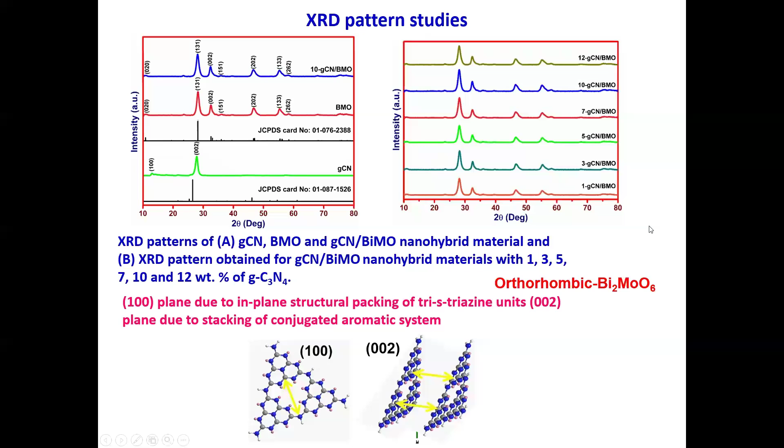Then the carbon nitrogen functionalities present in the prepared materials were characterized using FTIR analysis.

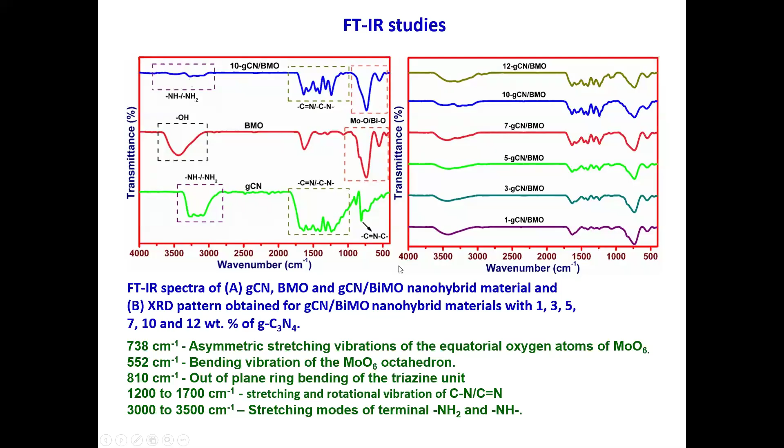Then we tested the surface area analysis. Just look at this - when we use the pristine material, it shows the least surface area. After making the composite, it shows a high amount - the surface area got increased.

Excuse me, there is one urgent call. Hello. Yes. Okay sir, okay sir. Hello.

So then we have done the contact angle measurement to check the suitability of this material to interact with water. If you use this graphitic carbon nitride, it shows the least contact angle. If you go with bismuth molybdate, it shows high contact angle.

When we make this graphitic carbon nitride bismuth molybdate heterojunction, the contact angle lies between g-C3N4 and bismuth molybdate. Why? Because this bismuth molybdate is hydrophobic in nature. So if it is hydrophobic, it will not interact much with water, and while doing water splitting, it won't give a better result.

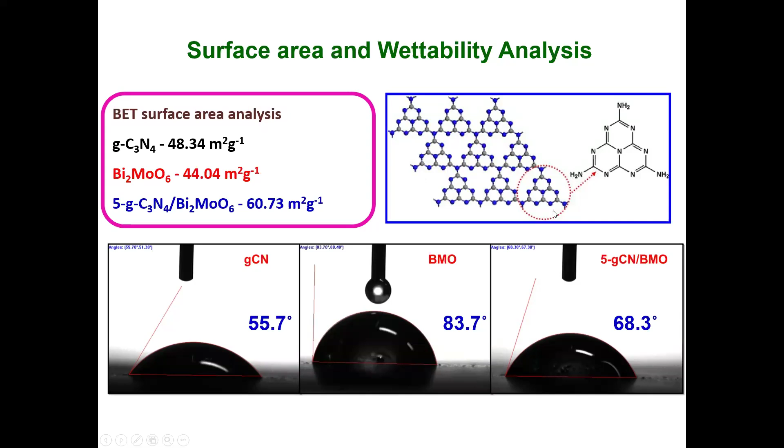Then we tested the optical property and measured the band gap for this. It was found that when we change this graphitic carbon nitride weight percentage, the band gap also slowly alters.

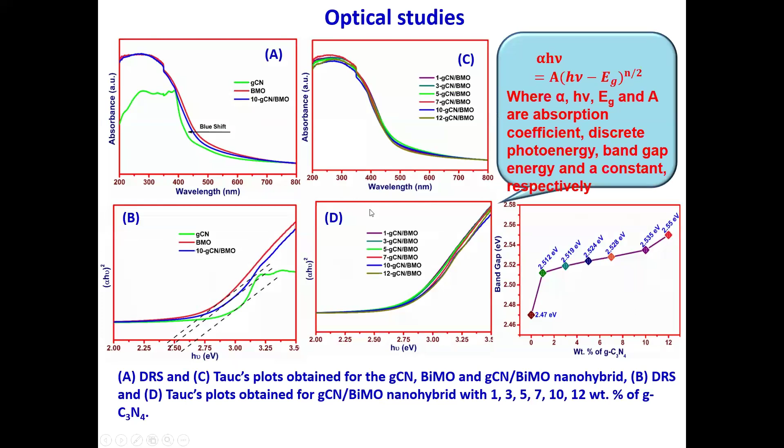Then there is another system. In the previous case, we prepared the material as a powder form and fabricated the electrode. In this case, we fabricated the electrode through the thin film deposition method. For that, we first did the electrodeposition of bismuth vanadate over the electrode surface, then later deposited copper oxide over the surface, finally obtaining a copper oxide PN heterojunction structure.

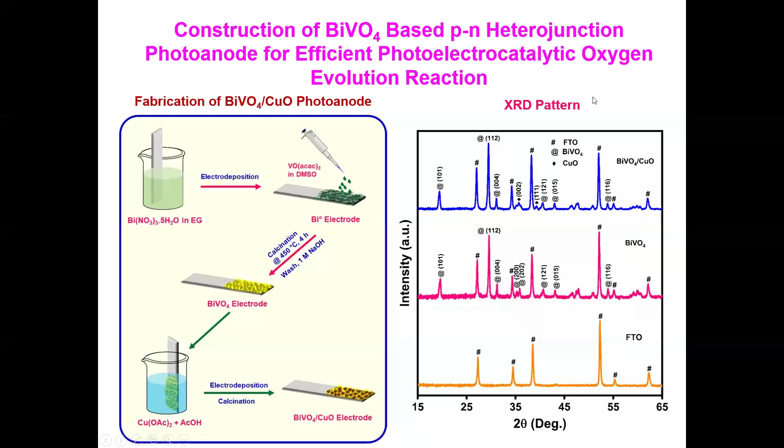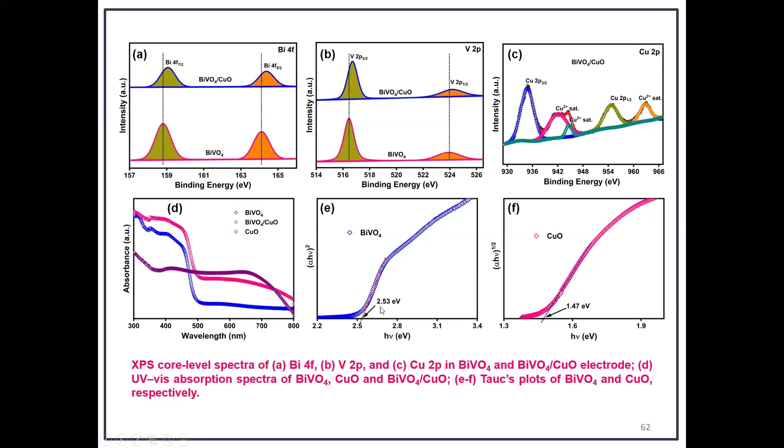As well as looking at this absorption spectra, it shows that visible light absorption for bismuth vanadate got increased after deposition of copper oxide over the surface. Then we calculated the band gap for bismuth vanadate and copper oxide through the Tauc plot method, and the values are 2.53 and 1.47 electron volts.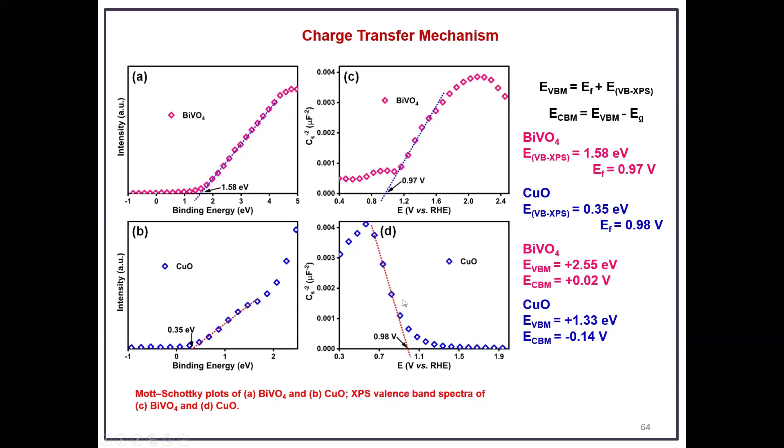Then we wanted to study the charge transfer mechanism. We did XPS analysis for the valence band of both bismuth vanadate and copper oxide, and Fermi levels also we evaluated through the Mott-Schottky analysis. Finally, we substituted all the values in this formula, and we arrived at the band position for both semiconductors.

So the stability and efficiency also we have calculated. It shows good stability and 0.3 percentage efficiency for the best performing material.

So we have done some of the work in our lab on this photoelectrocatalytic water splitting through the powder processed method. For example, by a hydrothermal method we prepare this kind of catalyst, then coat it over the electrode and study the performance. In another case, we prepared this material as a thin film through the electrodeposition method. So if you look here, the values and response for the first are all in microampere scale.

It is in the milliampere scale for the other. So it seems like a 1,000-fold enhancement in the photocurrent density, as well as the efficiency. Also, we reached closer to the benchmark efficiency, and we achieved a high catalytic hydrogen production rate.

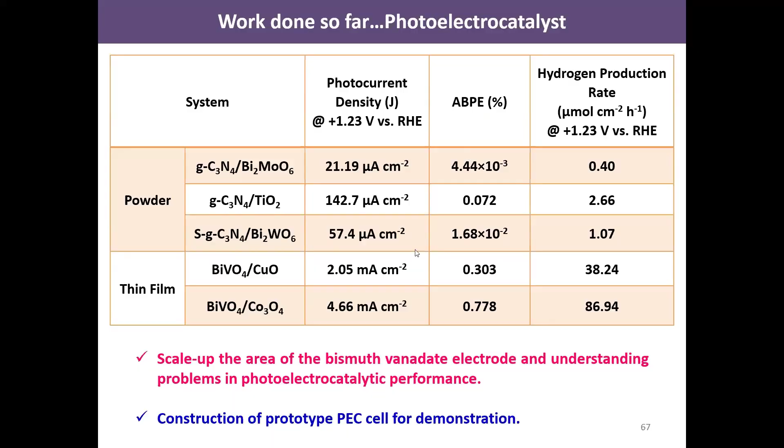So what are the results you have seen until now, and what you are seeing in this tabular column? It's all TRL 3 at lab scale investigation. Now I want to go one step further. So recall what results you have seen in these previous slides—that will be TRL 1, 2, 3. So now we want to go for TRL 4.

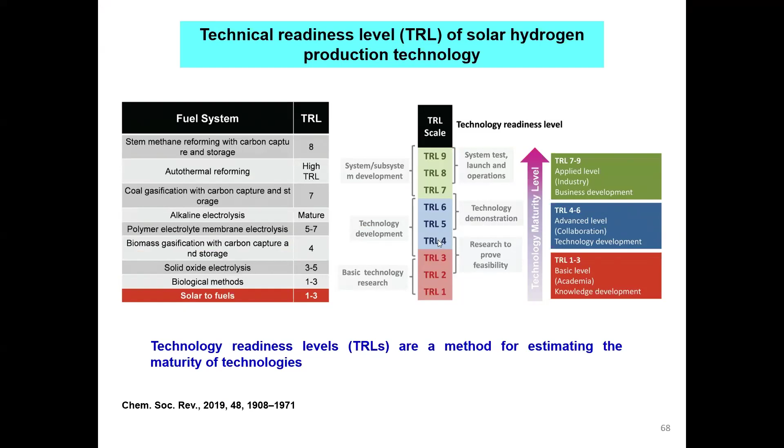So I will explain how we are going to achieve that. We have concluded that the best method for fabricating the electrode is the electrodeposition method, which gives good performance. Then we adopted the same method. We started from 1 centimeter square to 25 centimeter square. The results you have seen in the previous slides were done with this 1 centimeter square. So now we are scaling up this electrode from 1 centimeter square to 25 centimeter square.

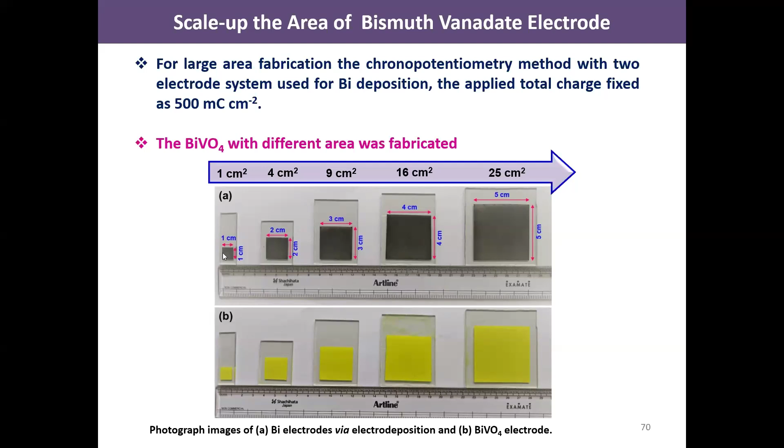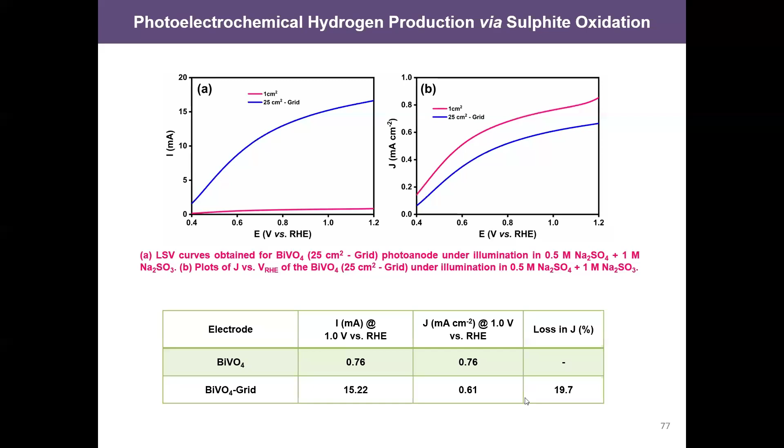Now we analyzed the performance. The pristine plain electrode shows 51%. When we use the line pattern, it shows 41%. With the grid pattern, it is 27%. Almost we have reduced the loss of photocurrent density by half. Further, we added a sacrificial agent and suppressed the loss to less than 20%. For a prototype device, a loss of less than 25% is affordable. So we have filed the patent on this.

We have checked the hydrogen production rate with different applied potentials, and observed this increase in the performance. We also checked the durability, and it shows that it is highly durable.

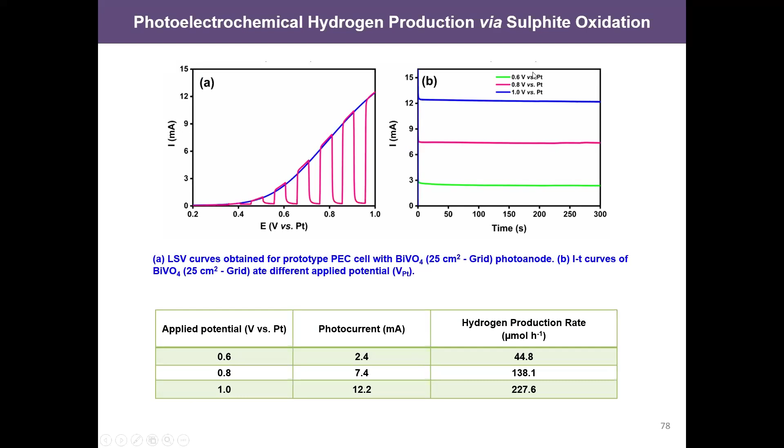So this is the summary of the presentation. Initially I discussed hydrogen, the importance of hydrogen, and how hydrogen can be classified into different color codes. Then the method for producing green hydrogen using photoelectrochemical methods, the heterojunction materials we developed in our lab, and their performance in photoelectrochemical water splitting at lab scale. At the end, I discussed the prototype development and its performance for green hydrogen production through this photoelectrochemical method.